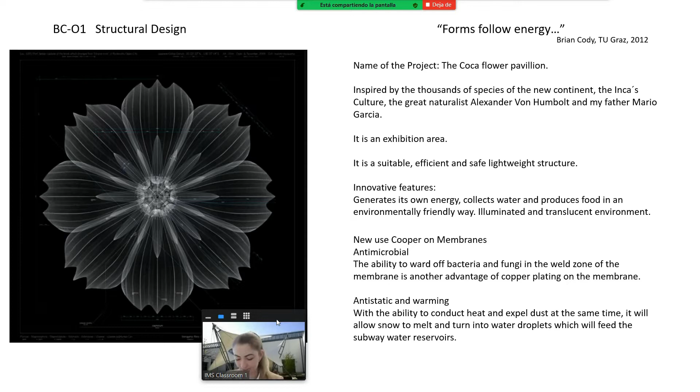So these are some of the features I consider we can research. The survey—we are in BUGA ERFURT, we have different loads to consider. I consider all the snow loads, all the wind velocity. According to the Eurocode, we have 80 load combinations in the software we use, IXCUBE.

So the area of the exhibition and events, called Coca Flower Pavilion, consists of a metal structure covered with a type 3 membrane tensile structure. The height is approximately 7 meters, with an area of 19 by 19 meters. It uses two types of upper and lower beams, like an arch, top arch and bottom arch, with whimsical curvature simulating the petals of the coca flower. On the left hand, this is the coca flower.

In honor of the Incas, we have a study about the coca leaves. They have a large amount of nutrients, and each 100 grams of coca leaf contains calcium, making it a major contributor of calcium. We have a project to feed the world with coca.

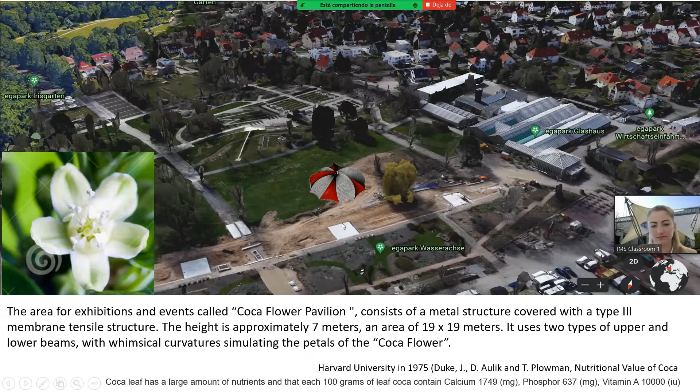After this, we consider Erfurt. We saw last month how the snow is, very cold for us, but interesting—well, like we said, a challenge for us. So we consider the type 3 Mehatop N because of its properties of cold resistance, high temperature resistance, and also because of the load bearing specification, the tensile strength.

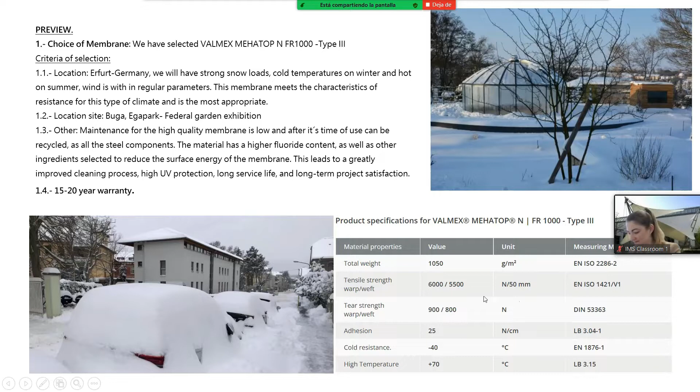So this is the flower from a top view. This is how we say we are going to use this building in the 21st century. Less is more—we have to take an ecological point of view. So this is an area we can use for hydroponics. And the material we chose was a PVC membrane.

I discussed using ETFE because we want to let in sunlight for the UV rays, but the cost of ETFE—if we use it, we'd need more or less 200 square meters of ETFE, and the cost of ETFE can be 600 euros per square meter.

Instead of using ETFE, we decided to use sunlight capture. The sunlight capture is simple—I'm going to show a photograph next—but we only need this to fit the plants because of the UV rays. Also, in our research we saw that Nasil, an Italian company, developed a solar panel with a membrane. It's still being researched, but it works. Beside the membrane structure, we want to put a digital outdoor panel that is powered by this wind turbine.

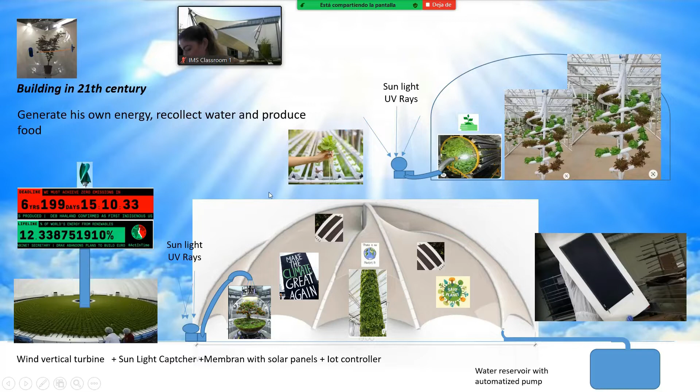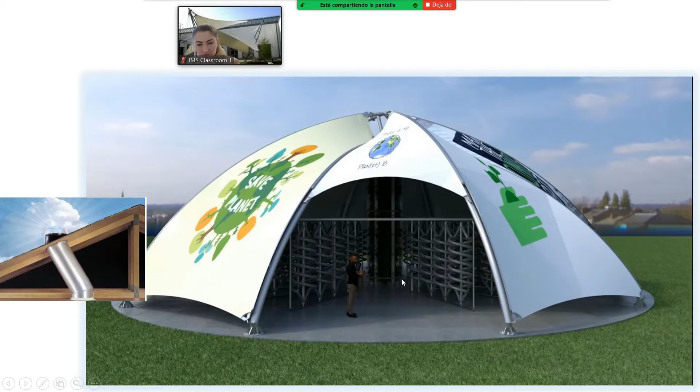So this is the light capture I propose to put in the ground to fit this. In this time, it is a hydroponical way to put the feeds in the column. Also, we are going to produce food. We are going to collect water in the center and in the corner plates. I'm going to show that design.

So this is printable. We are going to put a printable message according to the ecological point of view to show that membranes, white with a bit of color, can send an important message.

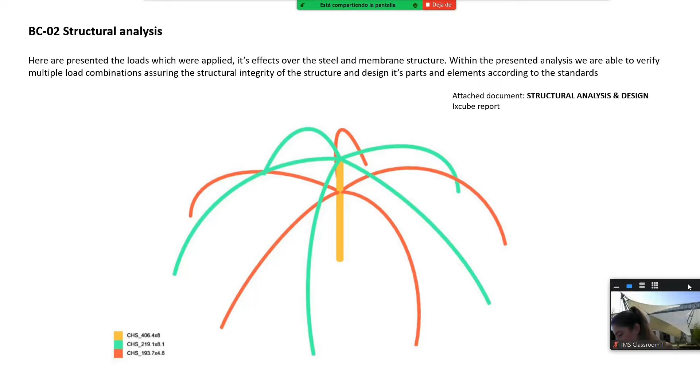Because of the structural analysis, here presenting the loads which were applied, its effects over the steel and membrane structure. Within the present analysis, we are able to verify multiple load combinations, assuring the structural integrity of the structure and designing parts and elements according to the standard.

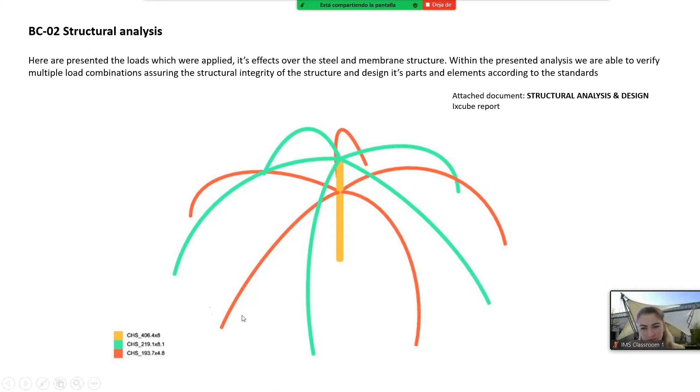We attach the structural analysis design IXCUBE report, and we are going to use 3 kinds of steel profiles. After the considerations, first we performed and analyzed the combination of loads that could affect the proposed pavilion at BUGA Park. We started with fixed connections in the C model, and then analyzed around with IXCUBE.

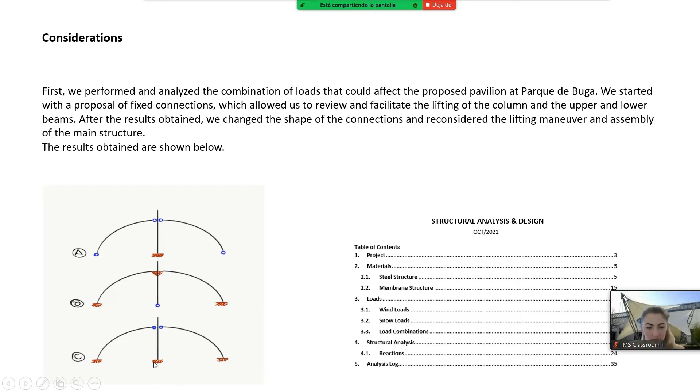We have too much tension in the center of the column, so we changed to the A connection.

To consider this, we saw Eurocode's wind safety factor and the safety factors. Also, we saw Brazilian wind standards - we used a perfect dome to simulate the force, the wind velocity, the safety factor and the factor of the winds.

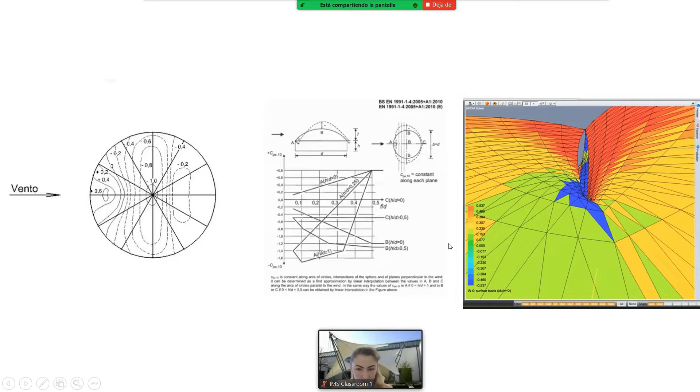We have pressure and also suction pressures. We calculated all the grades of the wind, 0 to 350. We also considered the snow, because we saw the picture - there is too much snow in ERFURT, and we took this into account.

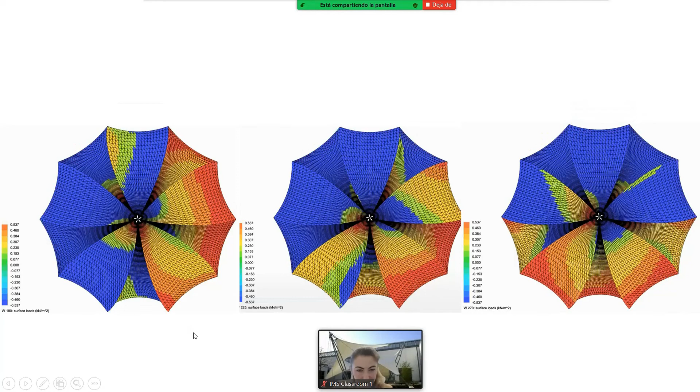You can see in the IXCUBE report how the wind behaves, the wind loads, considering the snow loads also. The IXCUBE has quick, high-quality tutorial classes on YouTube.

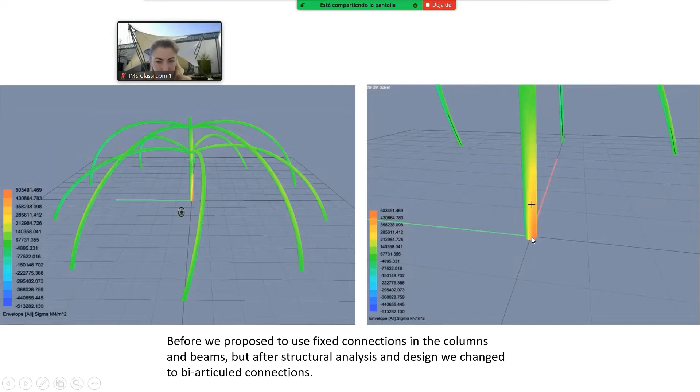And then we changed, we proved the moments and it was null. So it seemed that it was a good way of changing the joints.

Like I said before, among the joint options analyzed in the model - presented as A, B, C models - we chose A because having the bi-articulated arches of the structure, it's possible to save with the foundation for these arches, since the moments that reach their base is null.

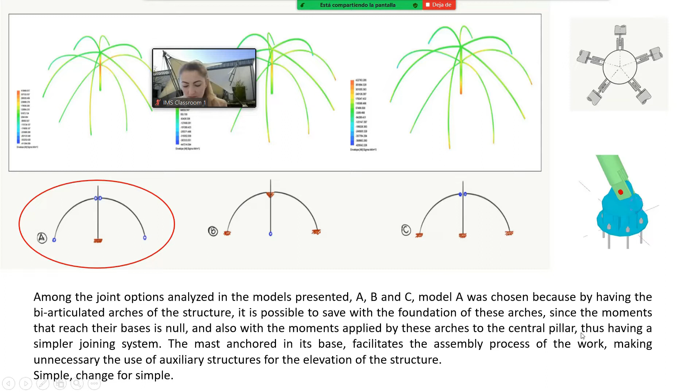Also, with the moment applied to these arches going to the central pillar, we have a simple joining system. The mast anchored in its base. This facilitates the assembly process of the work, making unnecessary the use of auxiliary structure for elevating the structure.

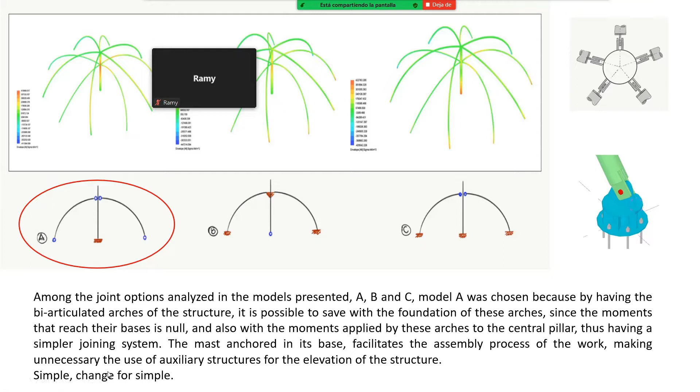So simple, changing the connection, and it makes us happy.

Following with the membrane structure, for finding the warp and weft directions, we saw that the report allowed us to follow this, and we also analyzed the snow distributed and snow concentrated loads.

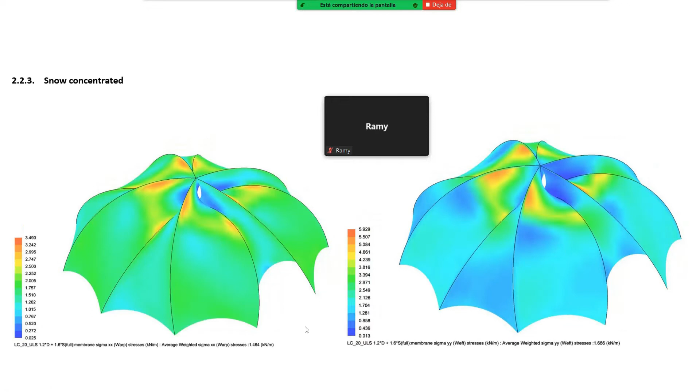About detailing and patterning, if you want more specifications, the IXCUBE report has more details and pictures about the wind, the snow, and all the load combinations.

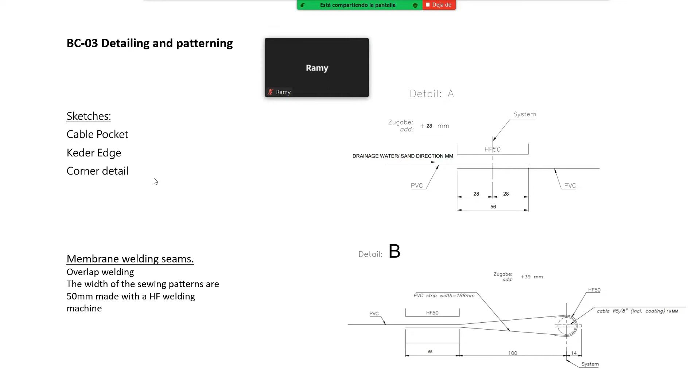About detailing and patterning, we made sketches. We're only showing 2 or 3 here, but we have all the details - the cable pocket, the keder edge, the corner detail, the keder and the pipe, the clamp, and this is the tube wall.

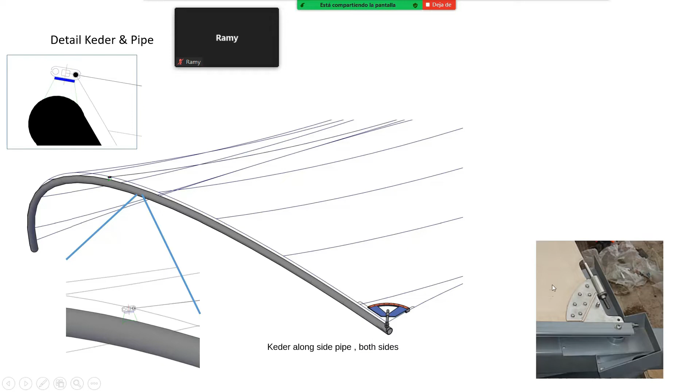This is the detail I want to show, how we're going to collect the water. Okay, the detail plate.

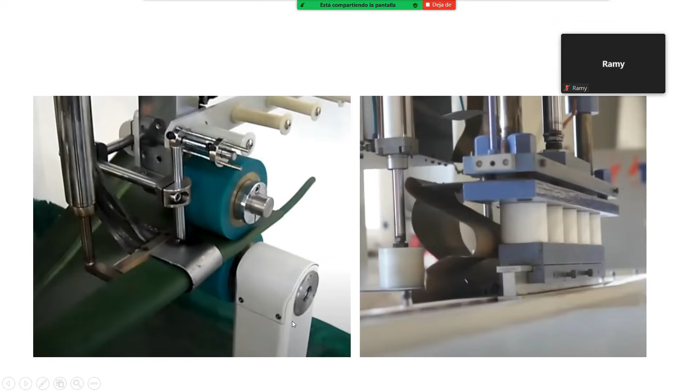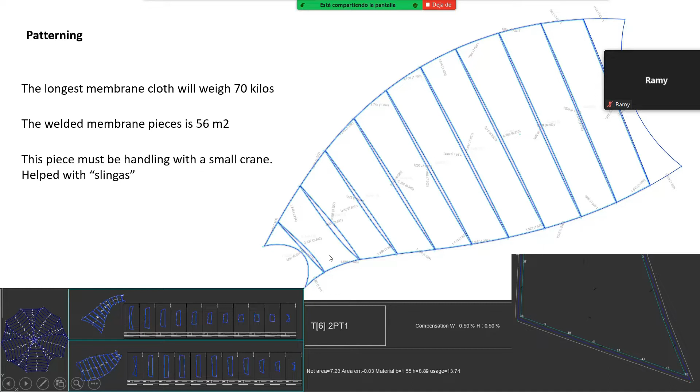The machines that are used, the welding machine, the high frequency, for detailing and compensation. The longest membrane cloth will weigh 70 kilos. With the welded membrane pieces, it's 56 square meters. So we are going to use a small crane.

And lifting order of the main structure. The main structure: first we put the column that is fixed with the foundation. And then we put the arch, the bottom arch, then the upper or top arch with the articulated connection. The detail is also attached in the blueprints of the steel structure.

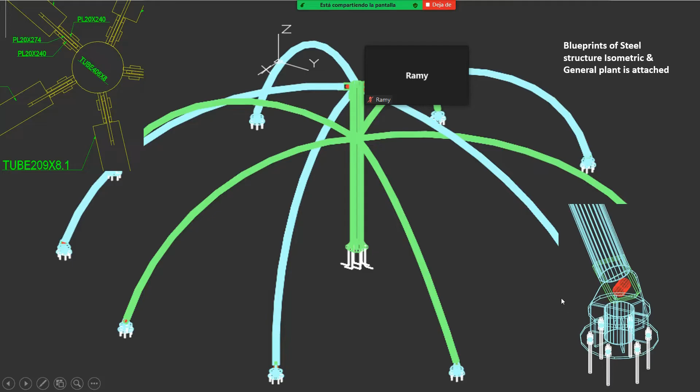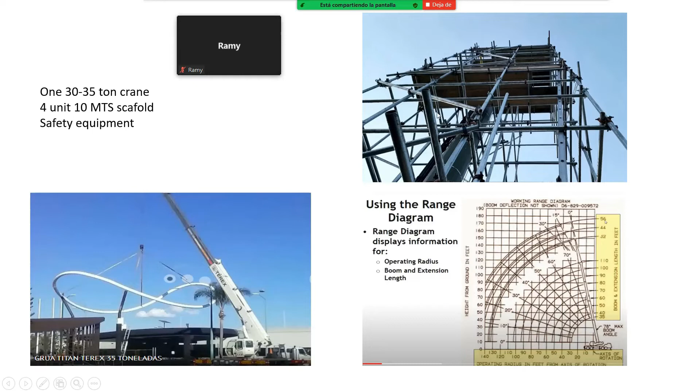Like I said before, we only need a crane and 4 units of 10-meter scaffold to support the arch and to fix the membrane to the beams. This is, like I said, a light structure, only more or less 6 tons of steel. It's about 15 kilograms per square meter. We have 375 pieces of steel structure. And yes, we are going to weld on site the flap for the last segment with a hot air gun.

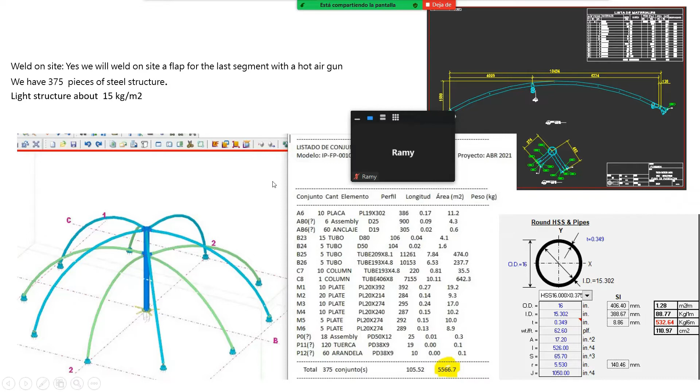For the foundation, we have 2 options. The fixed foundation with Hilti anchors, in the in situ cast concrete foundation, this is for the main column in the center. We are still discussing using ground screws and helicoidal piles or fixed foundation, because we only need 10 foundations for the rest of the beams of the arches. So we have only 11 foundations. And because of the snow, the wind pressure, and all the load combinations, we are inclined to use fixed foundation, in situ cast grounded foundation.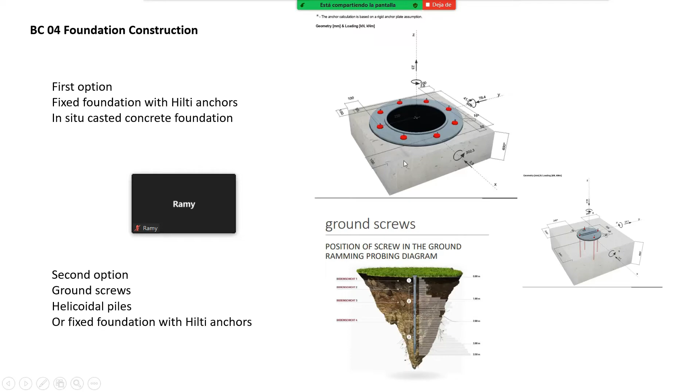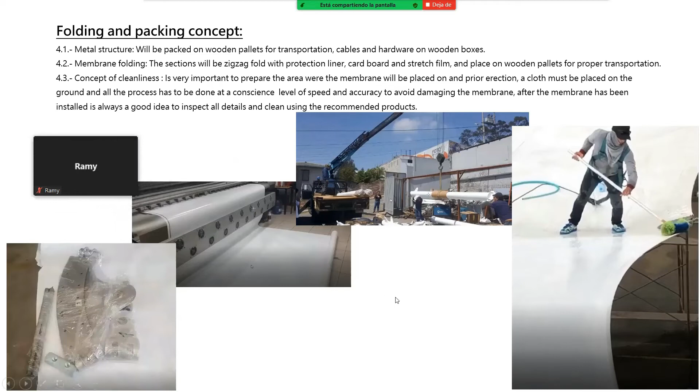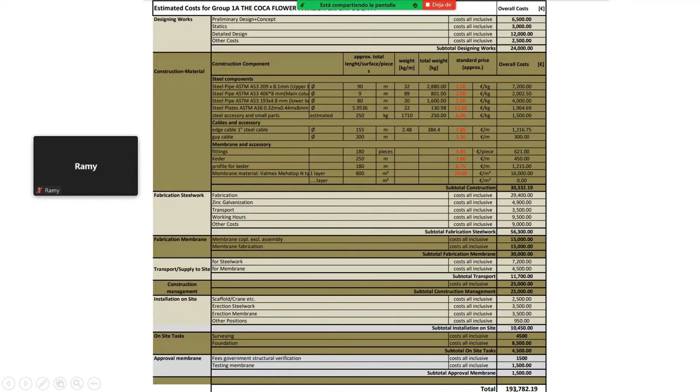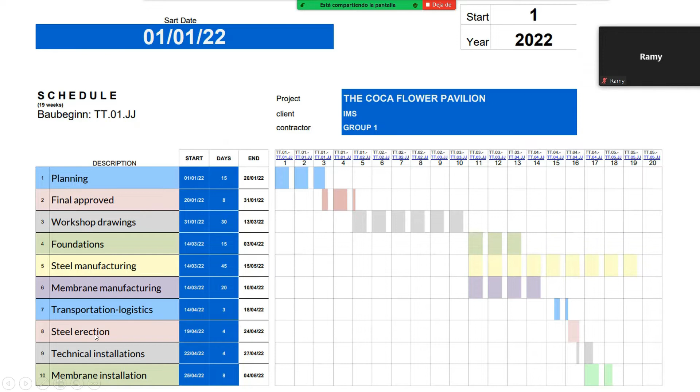Finally, folding and packing concept. Like I said, cleanliness is very important for us because of the dust. We will pack it on wooden transportation pallets; membrane folding and the cleanliness concept were also uploaded in the homework before. The cost: we decided to use one material because of the cost. PVC membrane is enough for us. ETFE is expensive for us. It only costs 193,000 euros. But yesterday we received a quote for the IXCUBE software, so we have to increase this cost. The schedule is about 19 weeks from planning to membrane installation, and this is the Coca flower pavilion.

So, do you have any questions about the Coca? I can answer. Thank you very much. Thank you. Should I start? Mhm. Okay.

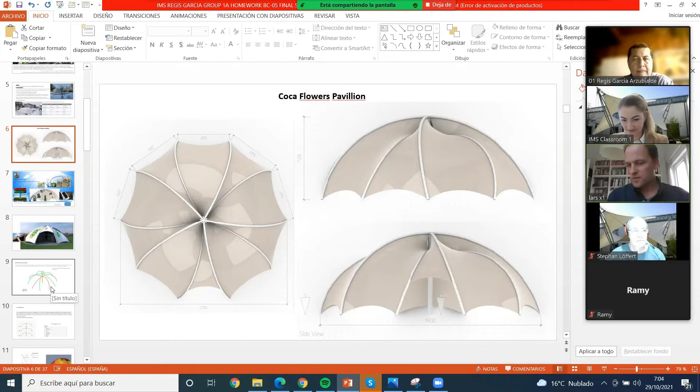One question about your structure, the load-bearing behavior. You have arches. The arches are connected to your main column in the middle. Yes, this is the fixed point, the column. And then you have these hinges around for the supports of the arches. There you will have vertical and also horizontal support reactions. Have you thought about how you can resolve the horizontal support reactions at the supports of the arch? Because you have to carry these forces, but there is a solution so that we have only vertical support reactions there. Have you thought about how you can solve it?

Yeah, well, thinking about the fabrication and assembly, we are going to use the scaffold and the crane, but we don't want to use more steel or connections between arches. Before, we tried to connect one arch with another with steel, but it's not necessary, because in the first design, the first sketch, the arch was helicoidal with an angle, but at this point we are going to put articulated connections, and it's enough. The membrane is going to fix the arch.

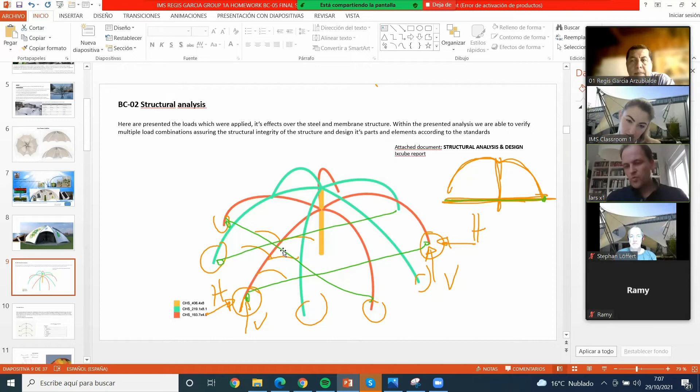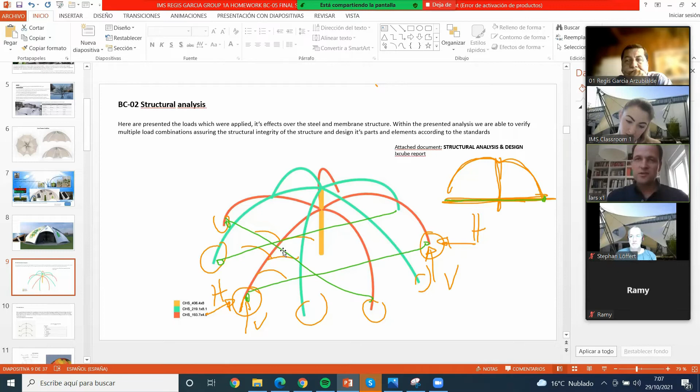And then we have really fewer foundations, because the screw foundation is for a temporary structure, but if you have deformation in one direction or the other, then we often have problems. And vertical support reactions are not really a problem, because then we have a precast element there, and the next one, and that's it. And you need these tension ties. This is the first one, just to improve it. My questions are always about how we can improve your structure and what is possible. Another and last question is about the snow loads. Yeah.

What do you think? Do you have to consider snow loads over the whole surface of your membrane? Or are there parts where it is not necessary to consider? No, snow loads are very important for the structure. Before it was a 12 m height column, and then we put 7 m height. It's more flat, and we can see this in the.

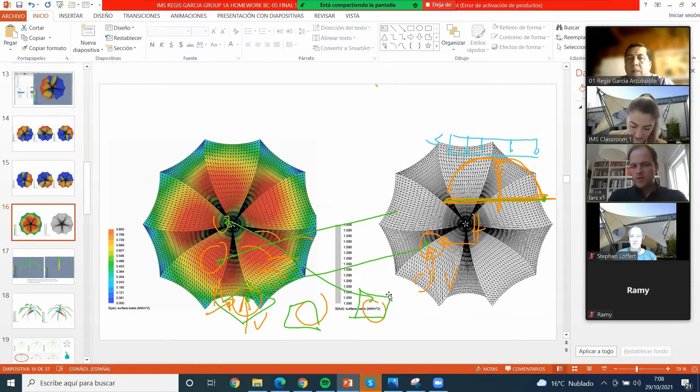Yes, I understand that you know about this, but my question is: have you put the snow loads on the whole structure? Have you thought about the inclination of your membrane? Because we put it on the whole inclined surface, the whole structure. Okay, but just have a look here. What is here, for example? Do you have snow loads there? Because there we have an inclination with more than 60 degrees.

But we will have, for your structure, problems here in the middle, because then we have sliding of snow loads to your center point. Yes. And this is then the snow accumulation. This means you have to consider drifting, sliding and accumulation of snow loads. Yeah? Okay, these are my questions.

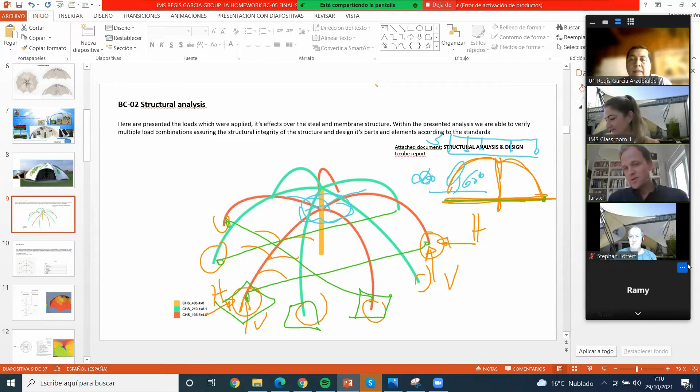But I like it very much because you have a vision in your structure and you have a topic. You start your presentation with a topic: form follows energy. I think this is a very interesting topic, and it's the right one to give answers to the real questions for us in civil engineering and architecture.

Yes. Thank you. Welcome. Thank you. Also from me, thank you very much.

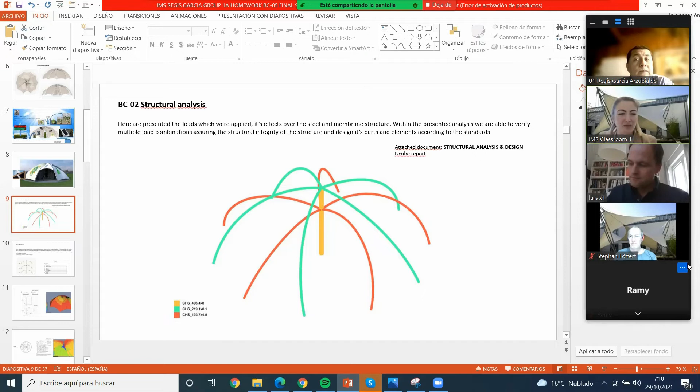I also really like your idea about the innovative features of the structure. And this is my point. Can you go up one slide, to slide 8? I think there is a very good picture. For me, it's a little bit controversial to see growing plants in the dark. I know you have these light tunnels from above, but maybe in a future project you can think about other materials. Yes.

PVC is very cost effective, but maybe for the people outside it's a little bit controversial. Maybe ETFE could be a better solution in the future, and then maybe you don't need the light tunnels. But this is only advice from me when I look at this picture. You have these plants in the dark, under the dark tent. Maybe it's just the computer visualization, but it's just advice.

Then I have one thing about detailing. Lars also talked about the arches, and the arches are inclined. Are the plates on your foot details also inclined, or are they vertical? Do you know what I mean? Yeah, you're talking about the details in the anchor. The foot, yeah. Because your arches are inclined, and is your foot plate vertical then, or inclined too?

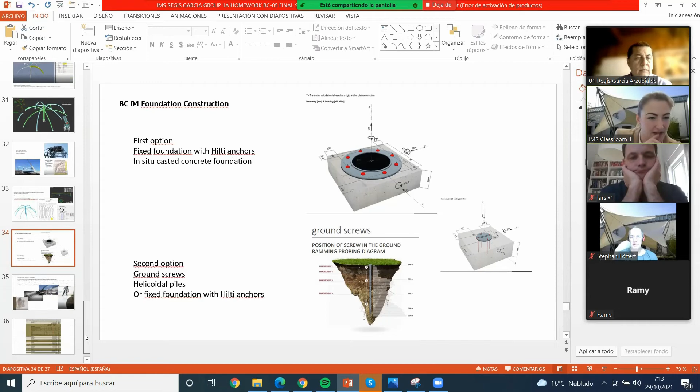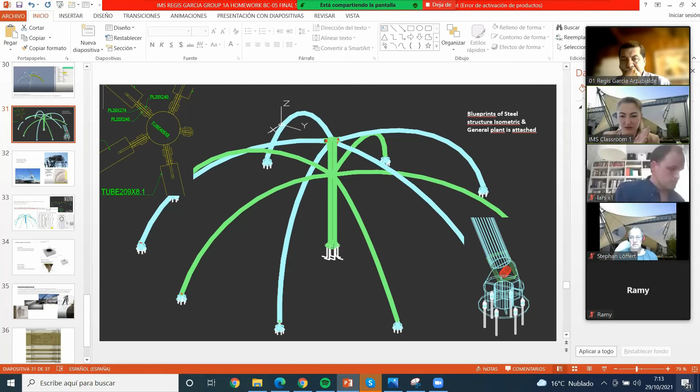Yeah, because I think you have to follow the forces in your arch to your connection to the ground. If you go to slide 31, yes, this one. Here, at the connection of your arch and the plate of the foot point, your arch is inclined, but your plate is vertical. I think maybe this is not good for the forces to transfer to the foot point. Or maybe I'm wrong, maybe the plate is inclined too, like you said, but I cannot really see it very well.

Well, because we use biarticular connections, also the anchor is vertical, but the connection is going to be a curvature. So this is the main, the moment is null because of that. When we began to fix it, the forces in the mast, in the principal column, were at the maximum the material can resist. We had to change something, and we discovered that changing that was the solution. Very, very simple. Yes, you are correct, of course, with the hinges there.

But the question of Sarah was just: you have this flow of the forces, and if the plates that carry the loads from the tubes to the foundation elements or the foundation plates are really in the flow of the forces. Okay, I think it is so. It's only the anchors, and this is then vertical, but the others should be in the direction of the tubes. Yeah. Yes, we are going to check it again. For the moment, I have no specific answer. Let me research more.